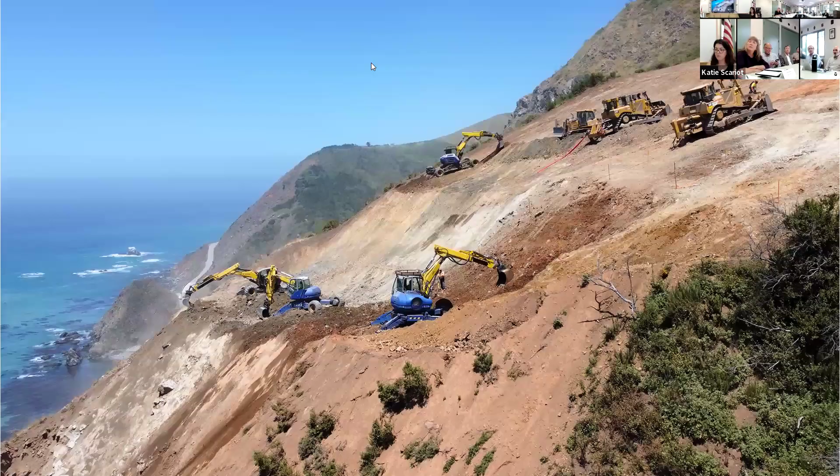Sorry to interrupt. I'm getting texts that the Zoom viewers are not seeing this presentation. They can hear us, but they're still seeing our agenda. Okay. Can you all see it now? Not quite yet. It just says you started screen sharing. Hopefully it's going to come up in just a sec. Maybe stop share, then share again, and pick just the document, not the screen. Is that working for you, Kate? I'm still waiting for it, but no image yet. Oh, there we go. I can see it in its full glory. Thank you. Great. We did warn you about technology. Yeah, I apologize. I wasn't able to log into the Wi-Fi.

I couldn't do this myself, but the strategy was to minimize what we're doing. So we try to minimize the excavations on the coast, and try to get the slide cleared as quickly as possible. So we wanted to take out the minimum of the slide. To do that, as you can see from the previous pictures, very steep terrain, right?

So we went in with the spider hoes. So here you see the four spider hoes, one up above the slope too, but we had the four spider hoes on site, very precarious, hanging down over that cliff. And so what we had to do was we had to tie them off to the dozers. So we parked dozers up above on the slope, and all those spiders were cabled off. And part of that reason is because it's obviously very unstable, a small sliver of material that we're trying to take out. Next slide.

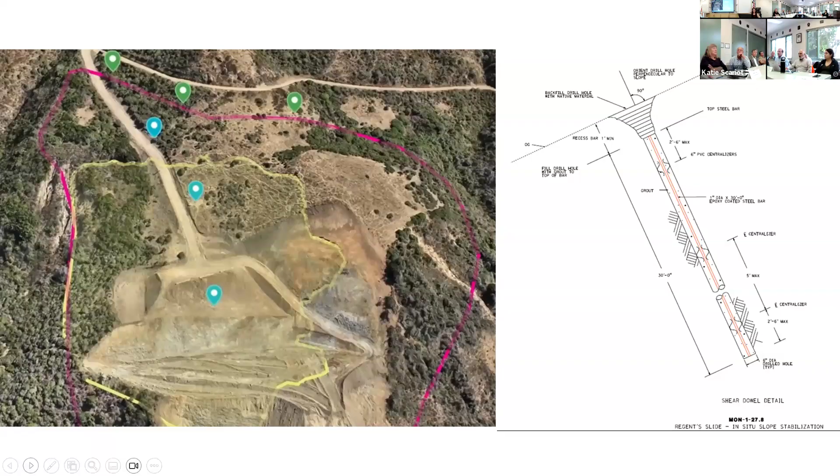It took a while to manufacture those shape arrays. But once again, we're in an active slide. We can't put workers down in there immediately. So we had to make sure we got all that equipment in place so the monitoring can resume again. In addition to that monitoring, we also have survey points all over the slope that we shoot manually, old-fashioned survey ways. Go ahead.

So early in December, we went right back to work. The rest of the work completed around Thanksgiving time or so. Got our monitoring in place, got our new excavation plan, went right back at it hard. And so you can see us moving down the slope again from the top.

And then what occurred was we had slides below us and to the side of us. So on the north side of the slope here, you see the one outlined in yellow. We called it the North Gully. There's a little ridge line in between, and then you can see the blue one called the overnight slide. So those are 2 slides that mobilized below us. These gave us some great difficulty because of the rapid rate of movement. Those things were moving up to a foot a day. So next slide.

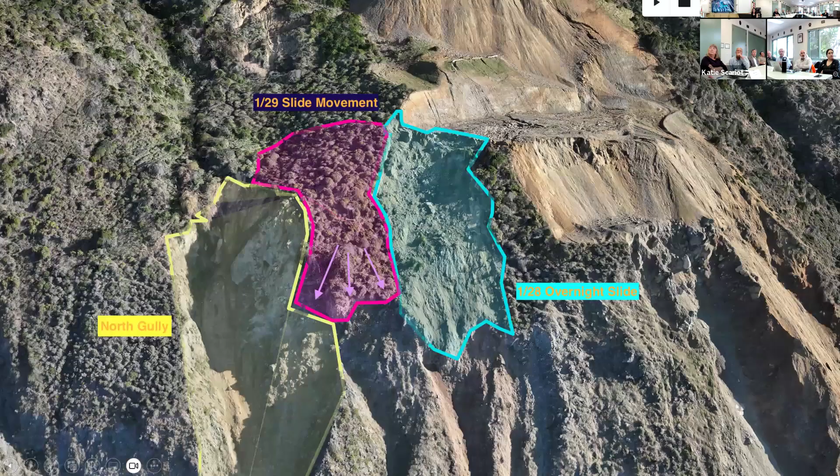I'm just curious, how many areas are similar to this? And is there any way to go in before the slide happens and stabilize them? No, I mean, obviously it's stood for a very long time without any issues, right? Right. And so we don't know when they're going to occur, how you stabilize it.

One of the issues we have, right, is when we go in, so we are in the Franciscan Formation, the edge of a continent, right? So it's a conglomerate of materials. There's all kinds of ridgelines. Some things are hidden, we don't see it. So the more you disturb, there's a chance of finding something else or creating another problem. So that's why the minimization efforts are best, right? One, it's quicker to get the road open. And two is that we don't want to get into these other areas and create other problems.

So, basically you can see, for example, especially the North Gully, material just started caving away. I mean, the bottom just kept moving and moving. I'll have some other visuals for that. Go ahead, next slide.

Sorry, it froze. Well, let's see.

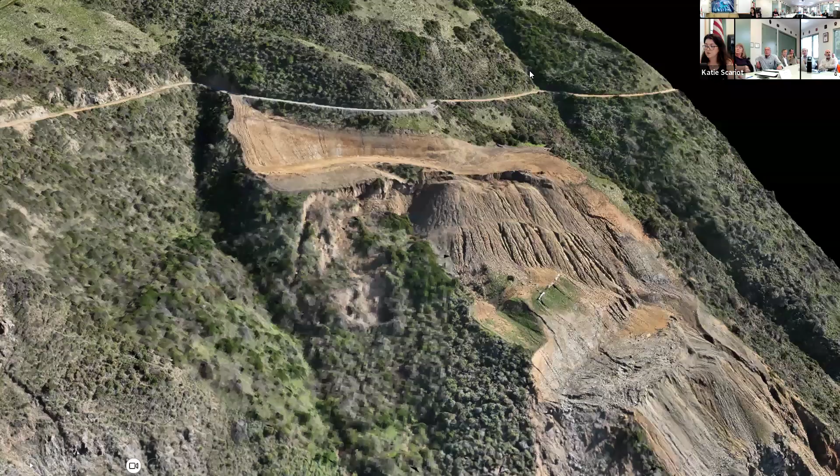A few slides back, when you went in with devices to see where the slide was moving, you said one broke off almost immediately. How deep were those? How deep was the break? That was probably about 60 or 70 feet deep.

So, well, we're kind of stuck on this, but you can see that bigger, flatter bench where you can see kind of that rocky area I talked about below. We got down to there, and then we went back and we got back down to that big, flatter bench that you see now, right? And then we retreated and got back up to the top. And so that bench will give us some challenges in the future too.

That's not supposed to share.

Paul's Slide is moving, constantly moving, different type of material, right? It's just like a muddy, saturated mess. There's no place to go to the top because, once again, the further you go, the more material comes down. And so we try to once again minimize what we can, get the road open as soon as we can. There's cracking all over that, but there's really nothing you could do with that type of material, right? And you can't just take the mountain down, you can't realign the road inland because you're still in the same formation, right?

It's the same type of material. So it's kind of the living with landslides, as we all know, right? So how do we minimize to get the road open as quickly as we can? We're committed to that. But I don't know that there's permanent solutions for these areas, right?

We tried to build walls and the walls just start collapsing. That Paul's Slide, there's a tieback wall there and all the tendons just snap. The contractors out there working, you can just hear them snapping while they're working. The whole wall is pushed out. We'll try to preserve everything we can to slow it down, but the wall has been compromised.

And so we've kind of reworked everything this past year to try to have an earthwork solution, move the road over a little bit, try to buttress the movement up above it. And so we're actively doing things like that. But I don't know that answers your question. Go out there, proactively search for things. I guess my point is actually the other way around. Okay. Because we haven't been out there looking for these things.

Our approaches have been less extensive than this, and our philosophy has been that there isn't a permanent solution in most cases. So we're talking about ongoing, not daily maintenance, but long-term maintenance most of the time. And that's what you see down Rain Rocks and Pitkins and those kind of places where we assume that this isn't done, it's going to keep going and we're going to keep dealing with it. We chose differently here.

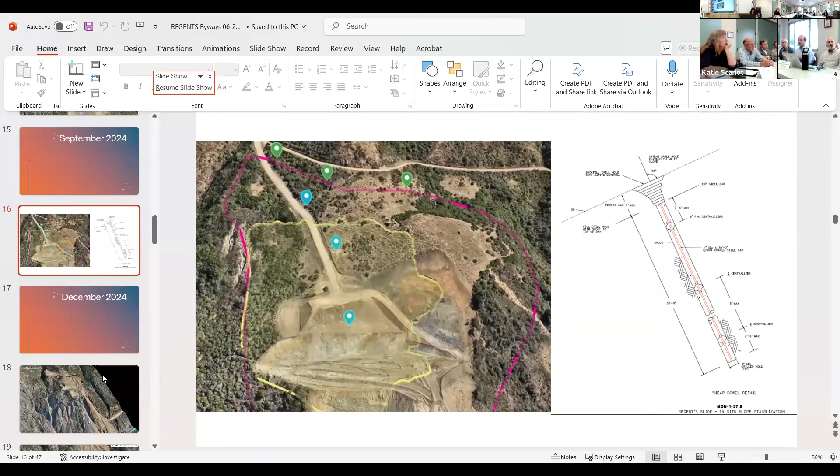And I guess I'm saying, our strategy is the same here, right? Our strategy is minimize, go up, just clean out the slide. Usually they're smaller, they're not as tall, right? But we just clean out the loose material, take the over steepened section back a little bit, and clean out the loose material. And this is just a taller one, but that strategy has worked most places that we do it, right? Because they're typically a lot smaller.

Here, we just happen to be into different types of material above us that we assumed were going to be more stable than they were. So I'm not trying to. It's along those lines. This is an area where all the builders know because it's got great stone, the faces on it, nice hard stone.

And I remember decades ago, a bulldozer going through and clearing a slide just so you could get a vehicle through and pulling a dump truck in there all loading up. So it's been doing stuff for a long time. And back in that time period, bulldozers would come or front end loaders and push the material off the side.

There's two questions in here. I know that the Marine Sanctuary has stopped putting the material into the ocean. And with operators working on these slides, some of them died. But now that there are remote controlled vehicles, machines, is it possible to go back to that in a way to just clear the material off?

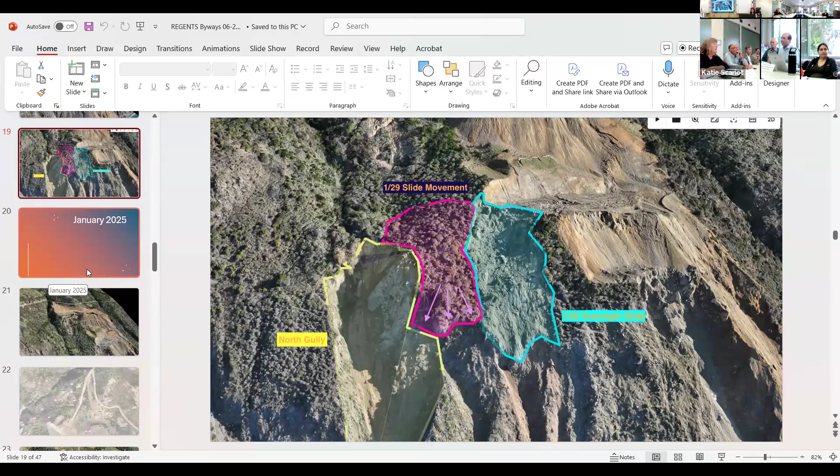That's the reason that, for example, the marine sanctuary has signed off on being okay with that in this particular case, because there's no other option. There truly is no other option here, yeah. So, like you said, we're not getting any obstacles from any of our resource agencies. They've been great partners working with us. And that's going to be the situation through completion of the project? That's what we anticipate. Yeah.

So can I ask what might be a ridiculous question? Obviously, Highway 1 is a north-south road and it's the only entrance and egress for the Big Sur area. Is there any possible way anywhere you could create an east-west access road? No. No. That's a pretty simple answer. Pretty solid one.

I guess to go back, just to close the loop on what I asked: I'm hearing you say that the approach and philosophy for your work has not changed. It's exactly the same as it has been. We're opening the road the best way we can. We're not now going to do something more extreme than we used to do. We're just doing what we have to do. Well, whatever we lead with, we want to be safe, right? We want to secure the area.

Remember, engineers can come up with all kinds of ideas, right? So we're trying to do the most expeditious, most reasonable thing that's going to secure it in a safe way, and I'll explain more as we go through the process here, to make sure that we don't have a problem here again in the future, as best we can. Because we know there's going to be problems in the future everywhere on this road all the time. Right, but it's rarely the same place twice.

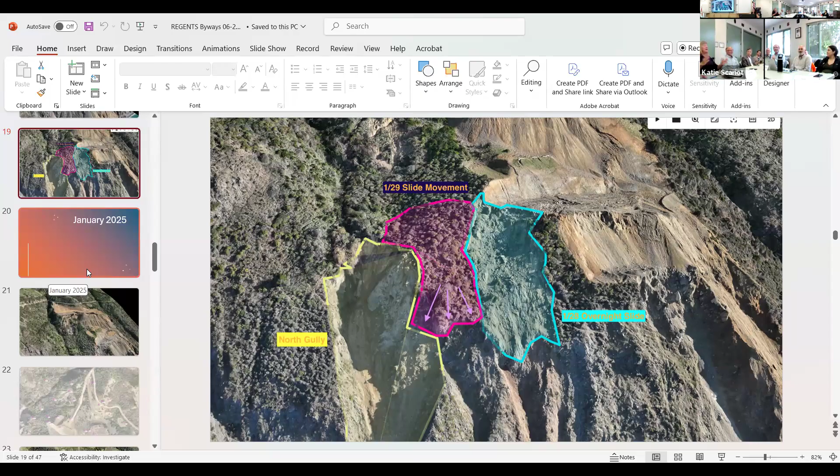Well, sorry. On the major slide, let me... But yeah, I'll let you, but that's where I'm struggling, so that's just what we're talking about. All right, so here, we'll go on to the next slide.

It's working on my end. So it's just the display that keeps freezing. Yeah, the TV display, so everybody at home can see the presentation. Can everyone see the presentation? Hey, can you see the presentation on Zoom? Yes, I can. Okay, let's go to the... Can you pull it off the side? TV. I can disconnect again, but let me see.

People in the room, the next slide is the photograph of a huge slide on Highway 1. There's dirt, there's a... Thank you, Rick. I can see it in my mind. Well, we're glad at least someone can see it.

How does this compare with, like, the McWay slide? Which one is that? Pfeiffer Burns? Yeah. Okay, so obviously back then it was, take the mountain down, right? We went all the way back, took the whole mountain down. Was that the quickest way to open the road? No. Is it stable today? Yes. But once again, that was more stable material. You look at that material, it looks like a DG, right? It's very good material that was able to stand.

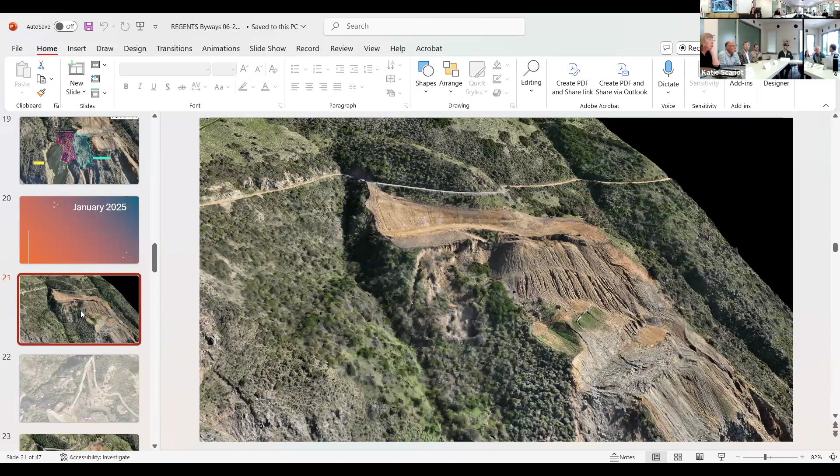Just one other thing. Could you clarify that? It's my assumption, with some backup, that at times maybe it's the road cut that has caused a smaller slide, but these larger slides are not dependent on the toe or the road cut. Correct. So what's caused by the road, what's not caused by the road, that's individually determined. Was that a contributing factor? So clearly Mud Creek had nothing to do with the road.

I don't mean to interrupt, everything about this is interesting, but it seems we're definitively frozen on the TV. We can go through the presentation, and people at home can see the pictures, but we can't see them except on the side. I think if we continue to go through the presentation, we can try for everyone in the room, as long as we keep moving along. Katie, what if I connected and ran the projector here and you stayed online and advanced for the Zoom? We can do that if you'd like. I'll try it. Yeah, we just have to start, I think, Mark.

For those of us that have been at it for a while here in this forum, you gotta admit, it's an implausible place for a road on so many counts. That's why everybody loves it. It's so special, because it's not a sane place to put a road. You get an experience you're not gonna get anywhere else. Since the beginning, it used to be seasonal. They pulled the bridges in the winter. So recognizing that, to begin with, it's a crazy thing to do, but that's what makes it really great. It makes it special.

Maybe there are some things I can talk about while we're waiting. They're doing their best over there. Some of the things we've done, and we can talk about it in future slides, but I'll talk about it now. We're sparing no expense. We're being responsible, but we're sparing no expense. We have equipment on standby on the mountain, pulling as needed. Any equipment we need, we're getting there. We're trying to plan ahead, make sure it's there when we need it, not a day later. For example, one of the drill rigs we have, I'll talk about later, is called a John Henry.

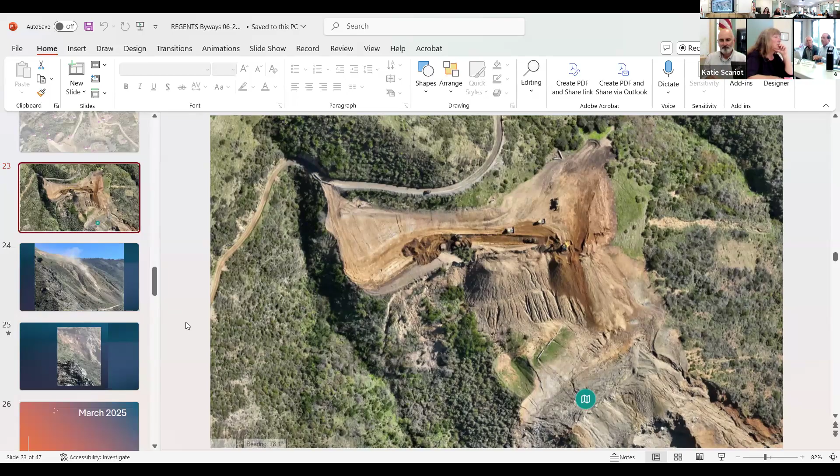Next slide. Go ahead and hit the play. I can wait for you to be in sync. I think.

And typically we would work as much as we could, right? So every hour we could work, we will work. And that day you can hear the dozers working up above, right? So next slide.

Just another ridiculous question here. I'm just curious, when I'm looking at this, I'm thinking about the amount of time it takes to do the work above and then clear below. Is there any way you can construct like a temporary bridge so that the road could at least be open north-south that goes over the slide portion? I don't know if that's possible at all, but. No, I mean, you'd have to go all the way out into the ocean, so there's nothing to hang it on. Yeah, there's nothing there.

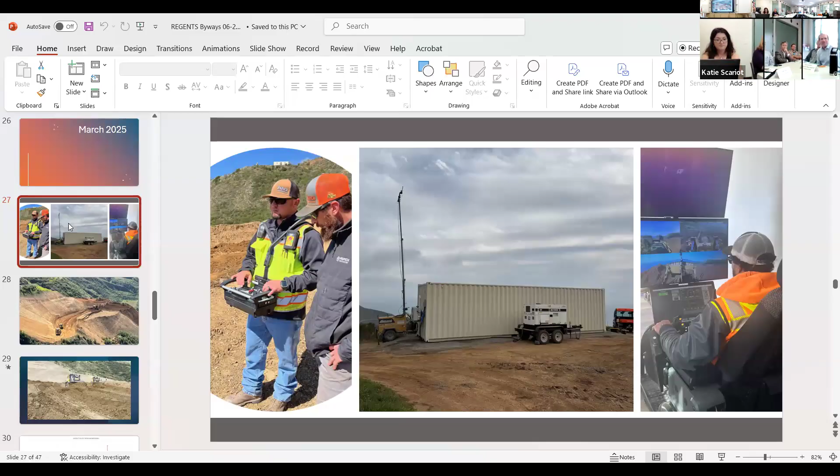So time check, I'm looking at 5 minutes. Yeah, so. I'll try to go really quick, sorry. I mean, again, we can run a little long, I just want you to know.

We got to a point where we pushed enough material, that lower bench I talked about before, the talus pile finally pushed out, and then we started making it back down to the ocean again, because it just kept stacking and stacking, adding weight, accelerating the slide. We got into a rhythm where we worked 13 days straight. I think there was good news. We met with the stakeholders. And we were having great success.

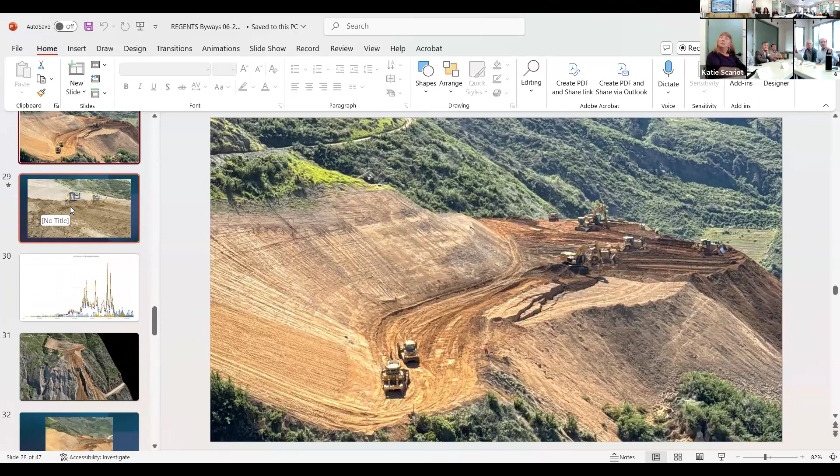But then what happened was, that's another quick video. We could probably skip this if you want, but those are just the 2 remote dozers basically pushing over the edge. It's a good video though. Once again, through our monitoring, you can see all the movement we had, the acceleration, those peaks, is the amount of movement we have. Next.

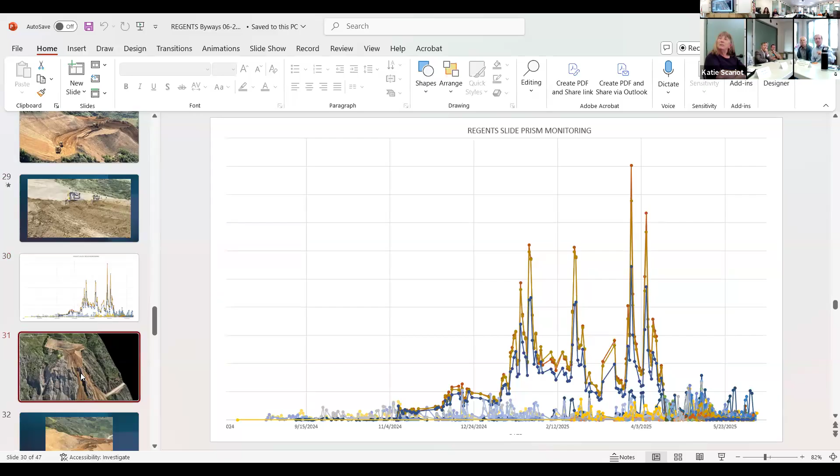And then where are we at? Go ahead, next slide. The resources you get to handle these situations, do any of them rely on federal funding?

It is reimbursable, yes. But I mean, the funds? Yes. The state funds it and then it can be eligible for federal reimbursement after the fact.

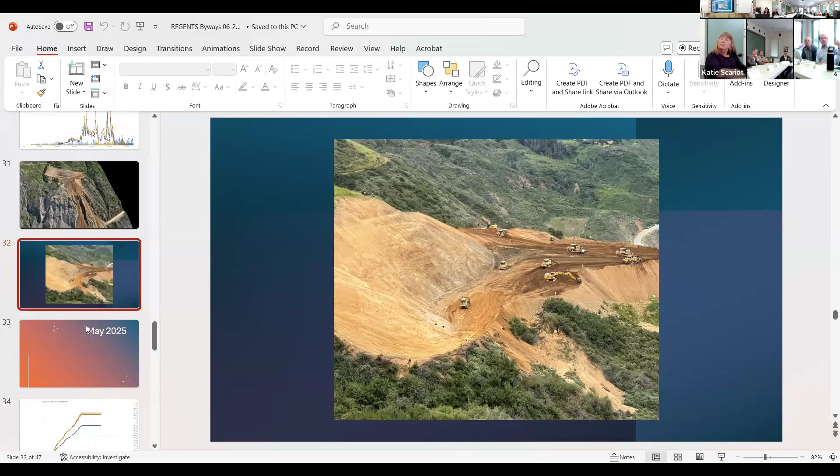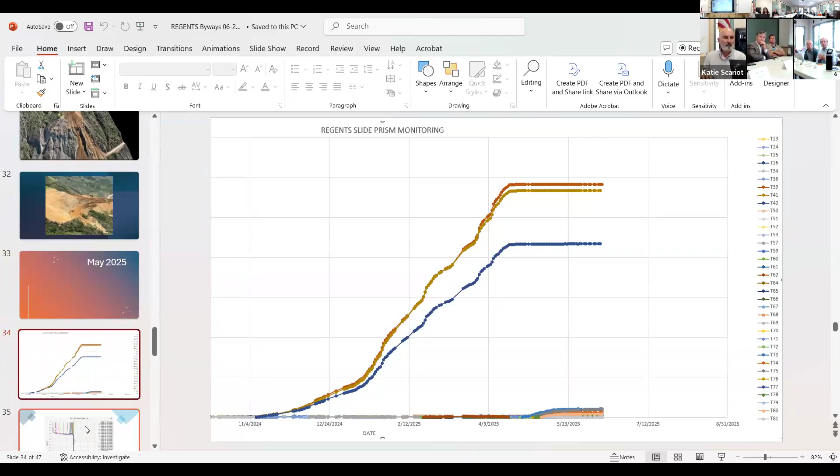So right at the time that we had the stakeholders meeting, a crack developed above us, and then the movement, we saw some slight movement earlier, but then it really started to accelerate. So we had to stop and think about what we're doing again. The crack opened up very quickly over a matter of a few days at the end of April, early May.

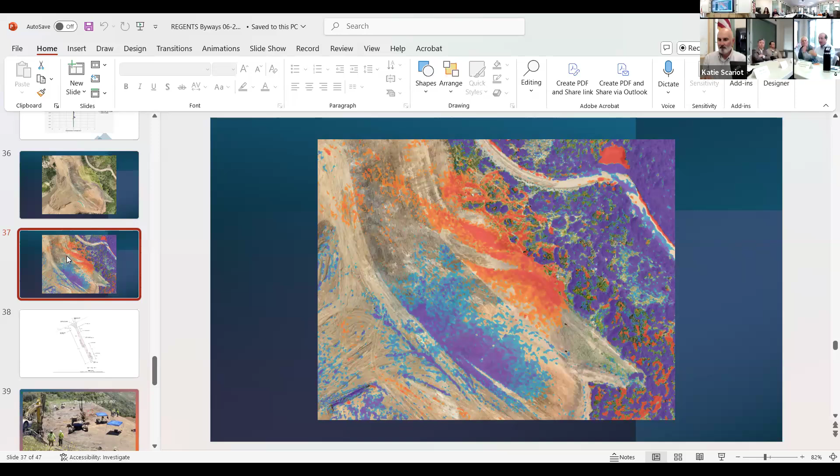So strategy again, next slide. We fly this with a drone every single day. We can compare day to day the different flights and how much movement there is. So red being going down, blue being going up. So we know this slide here is confined to that upper cut slope where we were at.

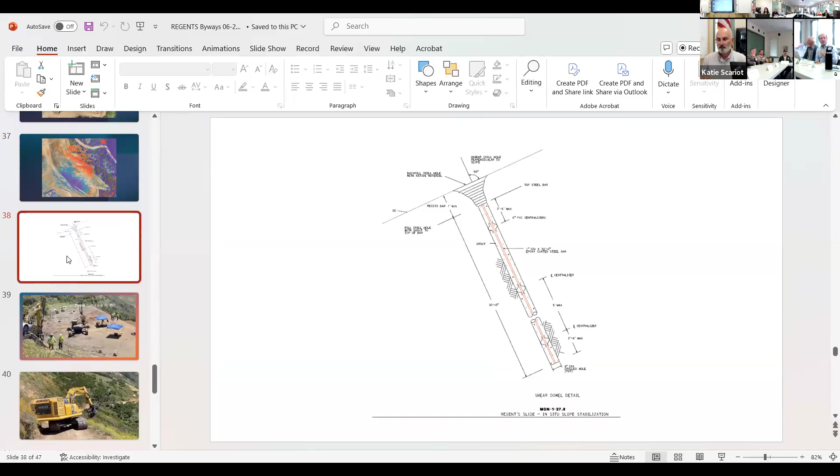So once again, the strategy was the shear dowels, right? So next slide. There's the spiders. We're doing dowels in that upper bench itself. And then you can see the one on the side there, he's doing them on the slope where the cracking was.

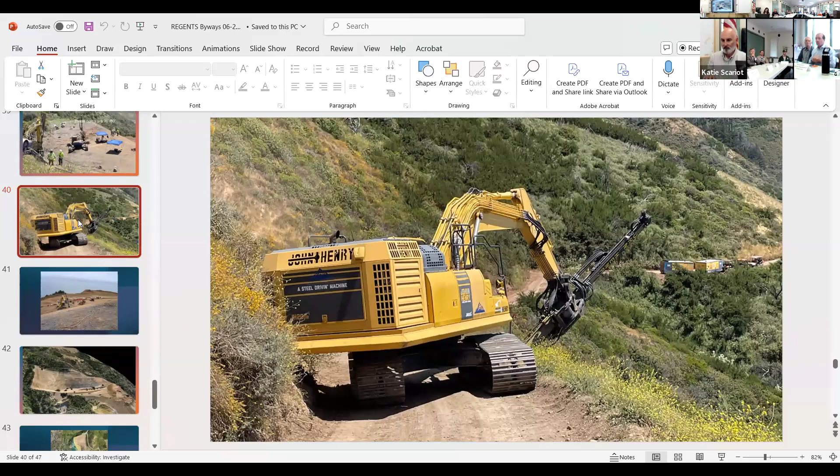Strategy this time, we said, let's go with the extra effort. We brought in what we call the John Henry drill. So with this drill, we came in and shored up the access road above us. We said, we need to make sure we stabilize that. We can't afford to lose that. So we stabilized that with this rig. It's much faster than the spiders. One of these can do as much as the 2 spiders in a day. It's just a different type of drill.

The strategy now is, for security purposes, we're going to shear dowel the entire cut slope that we have already cut, everything that we can reach from below and reach from above. And so there will be a small band that's not doweled, but we did build up a little bit of a bench to get the drill rig up there, and we put 5 rows of dowels where he's sitting now.

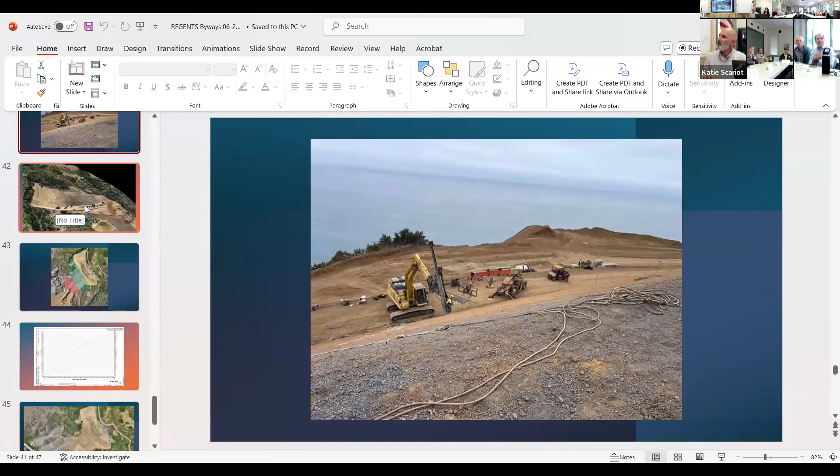We also brought in a second one of those rigs that were working so successfully. We did get a second one. And so they can pull in and get that whole bench done. You can see on the far right, they're already removing that temporary bench they put in. The dowels are done on the right side of the photo there, so they can start pushing that dirt out, and then the drills went to the left there.

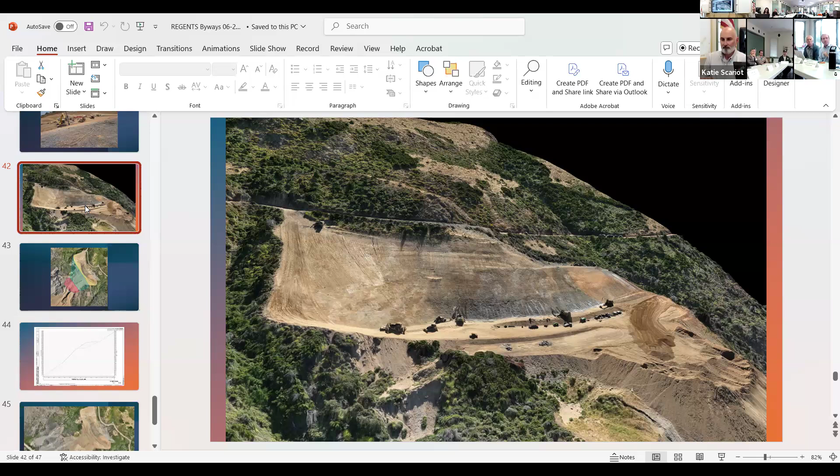So the new plan, once again working with our consultant and our geotechnical engineers, is that we're going to leave that bigger excavation bench in place, because the fear is that if we continue to excavate that out, we're going to have more stuff above us, because the slope is cut at a 1.5 to 1 slope right now above us, and it's not stable there yet. So we're going to leave the bench in, step out, that buttresses what's above us, and then we'll cut at a 2 to 1 slope down to that rocky area.

When you say 2 to 1, that's 2 down, 1 out? Yes. No, I'm sorry. Other way? Other way. Okay. So you can see, and then one of the things you can see here is, I'll do it on the next slide.

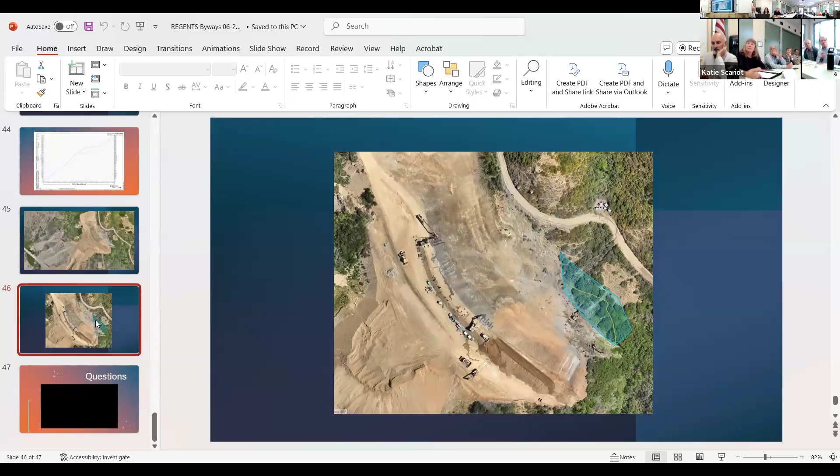I just want to show that picture. Open up the slide before real quickly. Sorry. So I just wanted to point out this one. It's kind of hard to see from the scale of it, but those other slides that I talked about, we're still seeing water coming out of the slope, right? We are still seeing movement. We're still seeing water. It comes out of different holes at different times, on different days. So it's one of the challenges, one of the unexpecteds we're still dealing with, right? There's still activity happening there.

So just take any questions, you could video while people ask questions or whatever. As long as we don't have the sound on. I just want to make sure we have a chance to talk to both the people here and remotely. So if you want to set us up so we can see who's got their hands up in the room. Anybody have something to ask? Yes. I can switch spots with you, John.

Yeah, it's two questions. Water. And then how do you know the access roads aren't gonna crumble with the rest of it? Once again, the access road, the section above the slide, we put in the sheet piles to help stabilize that. Preemptive, no evidence of cracking up there, but we went ahead and did that.

As far as the water, once again, it's the groundwater coming out. And it's coming out below the slip plane of the slide. So there's a more stable material under this upper slide. And there's water coming down that plane between those two different types of material, right? Which helps carry the slide. And at times, because it's still active, water will pop out here, then all of a sudden it's another spot, another location, but these two slides with a ridge in between on the north side there, we still see some activity through there. Okay, thank you.